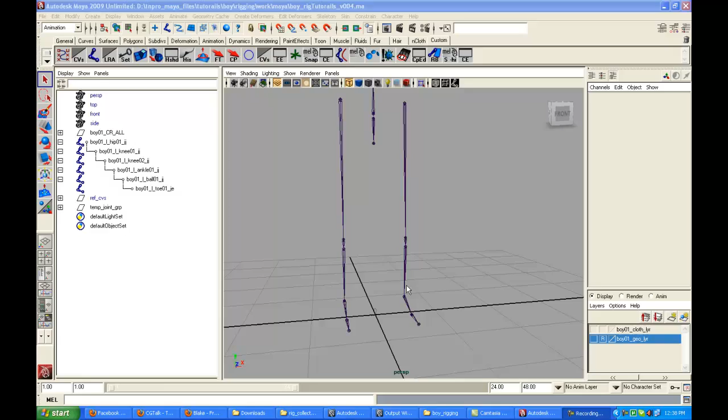Hi guys, welcome back. From this lesson we are going to start with this character.

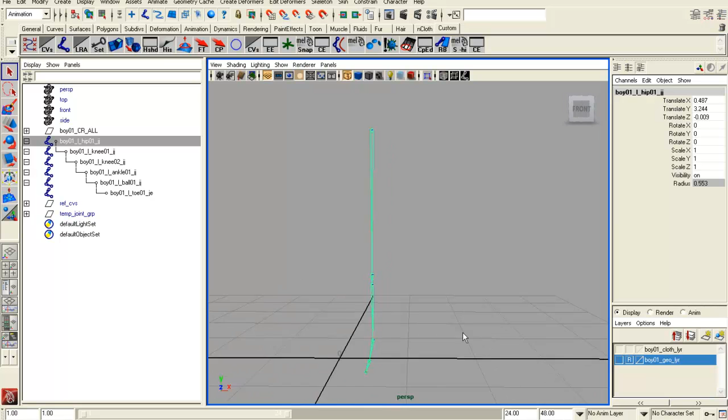What I have done is create a temporary joint group so it didn't come in the way while rigging this leg. Let's hide these joints and start to rig this leg. We are going to make 3 bone sets, IK and FK control, and both joints IK and FK are going to link with this hip JJ, and this hip JJ will be skinned with the geometry.

Let's get started. Let's duplicate it twice, Control D and Control D. Go to Modify, Search and Replace Names, search for JJ and replace with IK, apply, close. For the last joints, let's go with IK and FK.

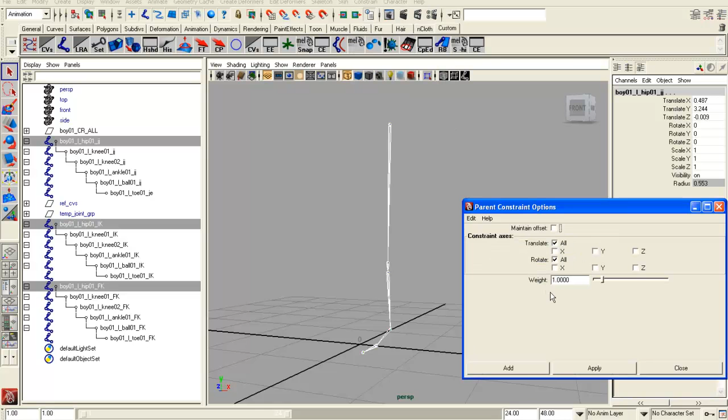Okay, let's bring this one and parent this FK and IK joint to the JJ joint. First select hip 01 FK, then IK, then JJ, and go to Constrain, Parent Constraint, Add. Do the same for all the joints according to their name - first FK, IK and JJ with the second joint. What G will do is repeat the last command. Let's do it again.

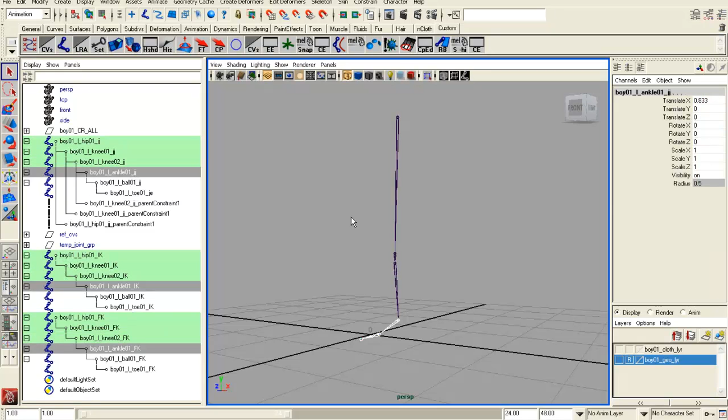Ankle, ball, ball, ball. Okay, G. Let's see.

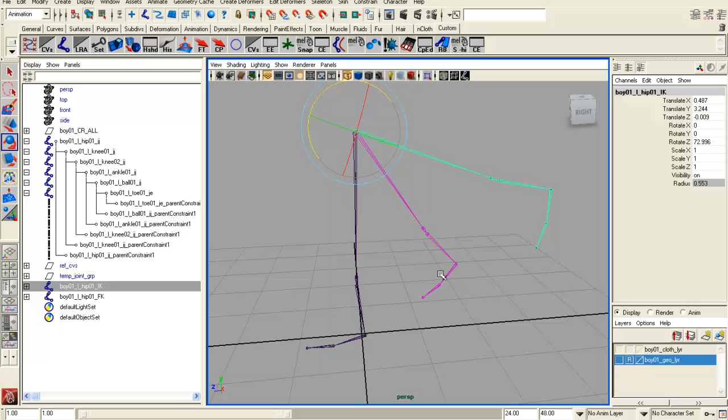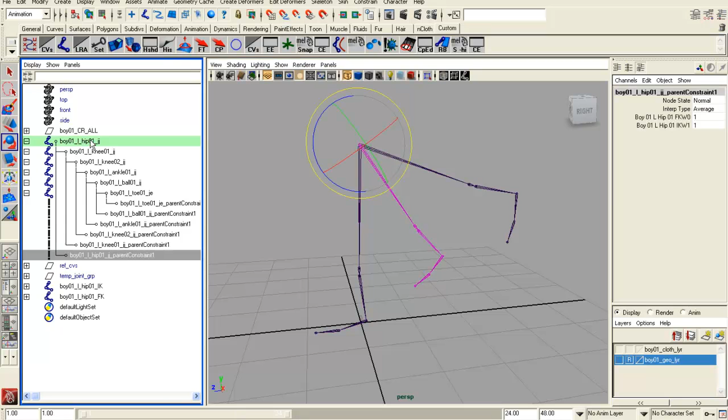Now we have created a joint, and it is going to move partially with IK and FK because we have done a parent constraint with both of these. So if you move the IK, now what we need is when it's on FK mode, it has to be fully controlled by FK, and when it's in IK mode it has to be fully controlled by IK. So let's go and zero this controller.

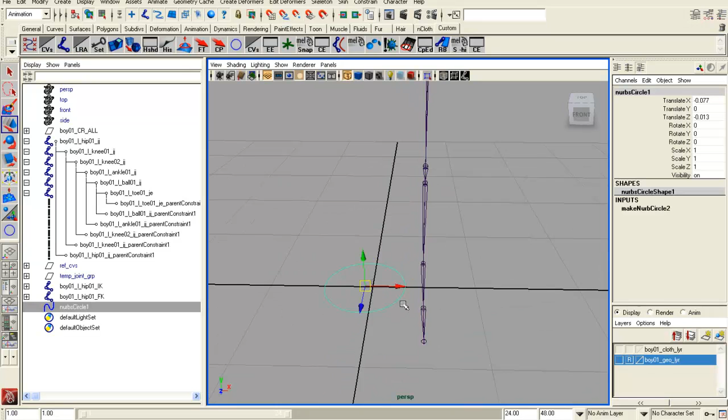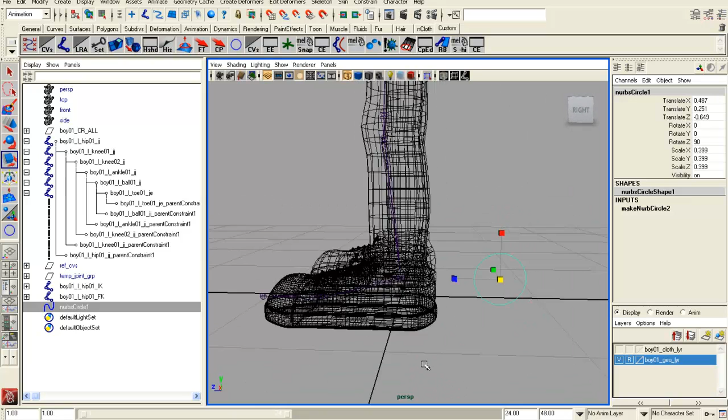Let's make a control curve, create a circle, and snap it to the joint, then show the manipulator. Let's place it up here. Let's rotate it, shrink it down. Okay, let's make a controller.

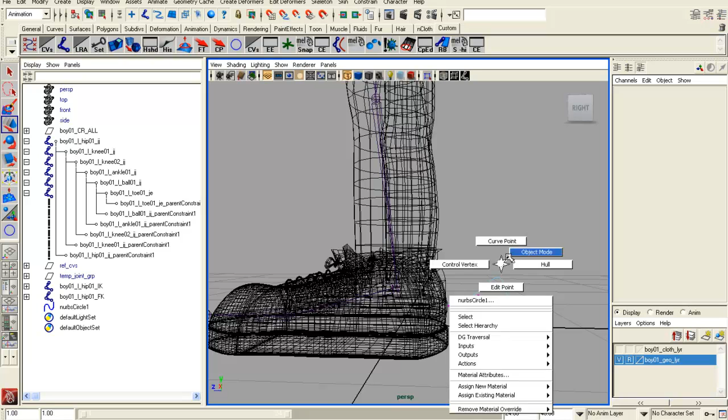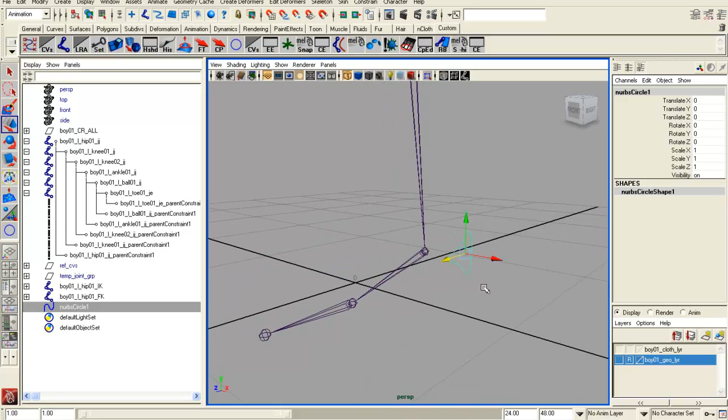Let's freeze this transform and hide, delete history, move it a little bit further, just transform, and then hide the geometry - it has to move along with the leg. So let's select the hip, actually the ankle would be better, select this and go to Constrain, Parent Constraint, and this time maintain the offset, apply, and it's done.

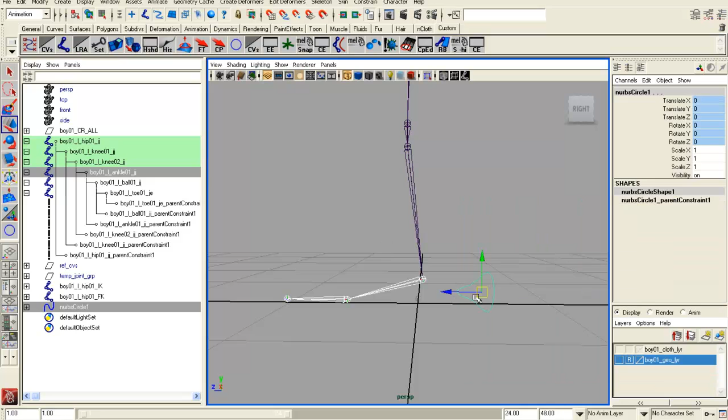Let's lock and hide its attributes. Let's rename it boy underscore L, because it's on our left side, underscore leg underscore blend, leg blend.

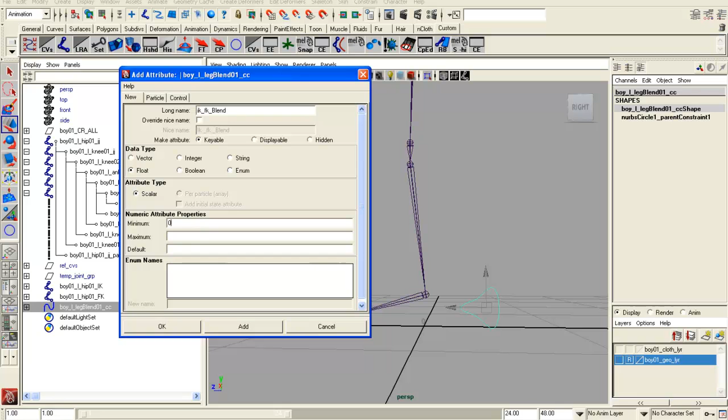01 underscore CC. So what you need to do is create and add an attribute. Go to Modify, Add Attribute. Let's name it ik underscore fk underscore blend, minimum to 0 and maximum to 1, and hit OK. The attribute has been added, 0 to 1.

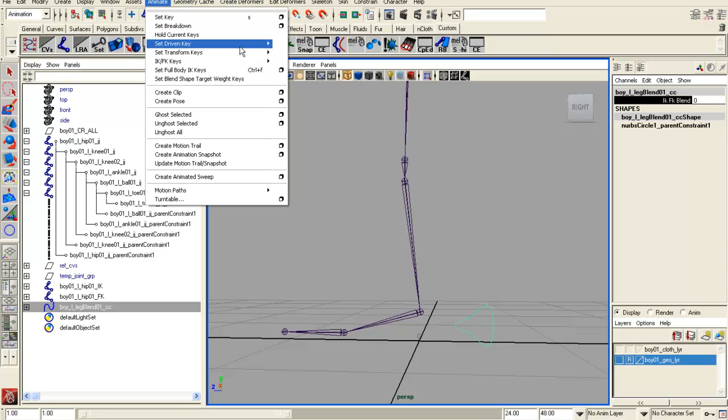Next we're going to do some set driven keys. Go to Animate, Set Driven Key - I have it on my mel command line. Select and load it as a driver, then go and load driven. What we need is when it's on 0 we need it to be in IK, and when it's on 1 we need it to be in FK. So it's now on 0.

Go to Select Driven Items and let's set it to 0, select both of these and hit Key. Okay, go to 1, select driven items, FK to 1 and IK to 0, hit Key, and let's repeat the process for all of the joints.

Load driven. When IK is in, let's make it 0 and select driven items, FK on 0, IK on 1, key, then let's make it 1, select driven items, FK on 1 and IK on 0. Let's do it for the knee.

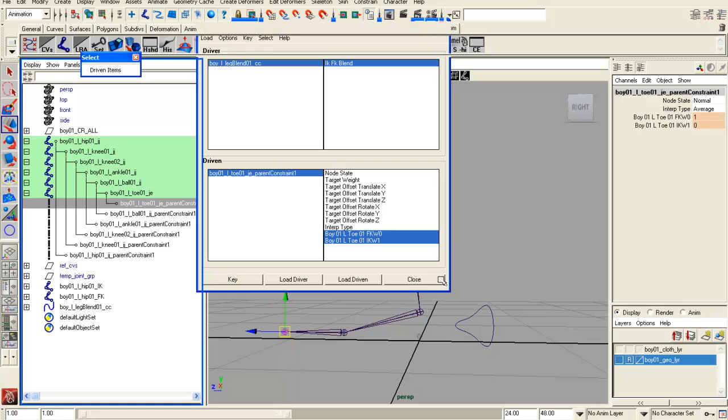I think the last one is left. So it's on 0, select driven items, make it 0 and key selected, then select it again with the value 1, select driven items, 1 and 0. It's done - close the window, close this a little bit.

So it's on 1, so it has to follow the FK. When it's on 1 it will follow the FK, and when we move it to 0 it will bind with IK. So it's working properly.

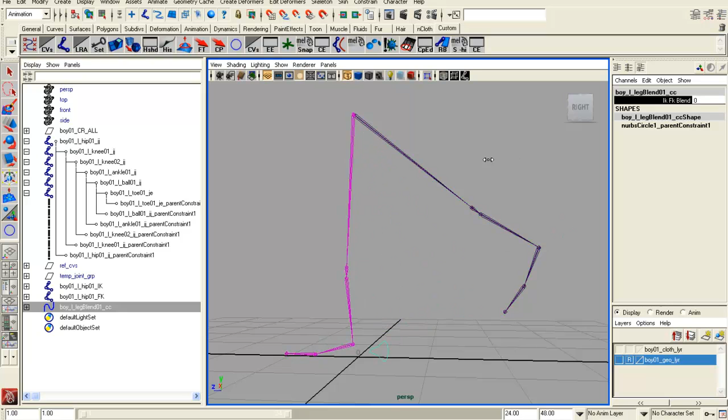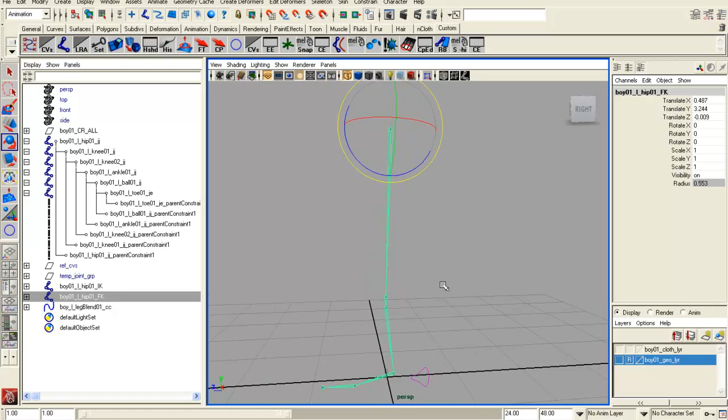So next, let's wrap up this chapter. In another lesson, I'm going to rig the leg in IK mode, then in FK mode, and then you'll understand why we have done this setup - because some animators love to work on IK and some love to work on FK, and there are things that can only be done in FK rather than IK. So it's important. Let's go to another chapter.